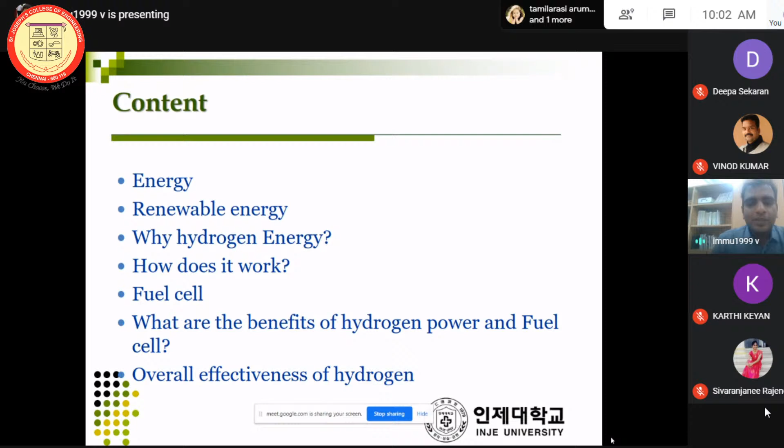Everybody needs energy. If we want to walk, we need energy. If you want to ride a bicycle, we need energy. If you want to ride a car, we need energy, but it's a different form of energy. If you want to watch a TV, we need energy. If you want to work on a computer, we need energy. Energy is not only physical energy, energy is available in various forms, so we are using that energy according to that purpose.

By this time, everybody knows some common facts of energy - what is energy, where it is coming from. Generally people think it's coming from the combustion of fossil fuel like petroleum and natural gas or coal, or from nuclear energy, which is converted later into electrical energy as electricity. Everybody knows about electricity, but electricity is not a primary energy source. It's a carrier - it helps to store the energy and helps to transport the energy according to our use.

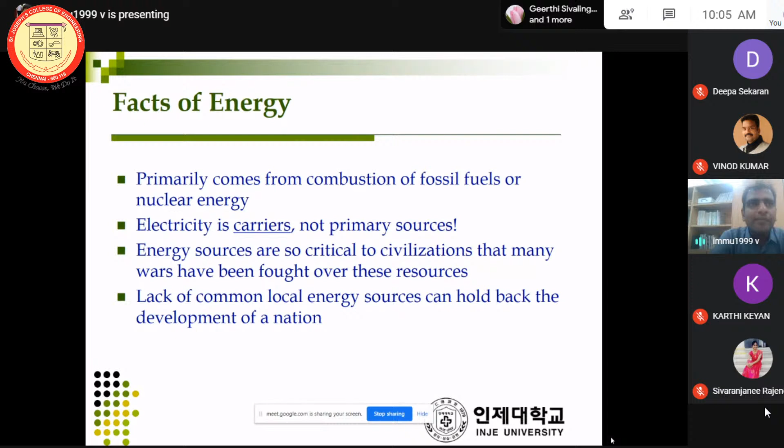In history, energy is very, very important for humankind. There are many wars that have been fought to conquer energy resources. If the country has good energy resources, the country would be a rich nation, like Saudi Arabia, United Arab Emirates, and Qatar - these countries have only energy resources other than nothing, but they are now rich countries. Likewise, if the country has good power but does not have energy resources, its development is held back, which leads to poverty.

So energy is available in various forms. According to the first law of thermodynamics, energy cannot be created or destroyed, but one kind of energy can be transferred into another kind of energy. So here are some examples of forms of energy.

One is heat energy. Everybody knows about heat, it's very common, available everywhere. Heat energy is released as a result of atom movement. The next one is electrical energy - electrical energy is created by the flow of electrons from one place to another place, so the flow of electrons creates electrical energy. Likewise, potential energy - potential energy is the internal energy for any material.

And chemical energy is energy stored in the form of chemicals, and it can be released by chemical reactions. That is called chemical energy. And finally, nuclear energy. When we break the atoms, it releases its energy, and later it converts to thermal energy or electrical energy.

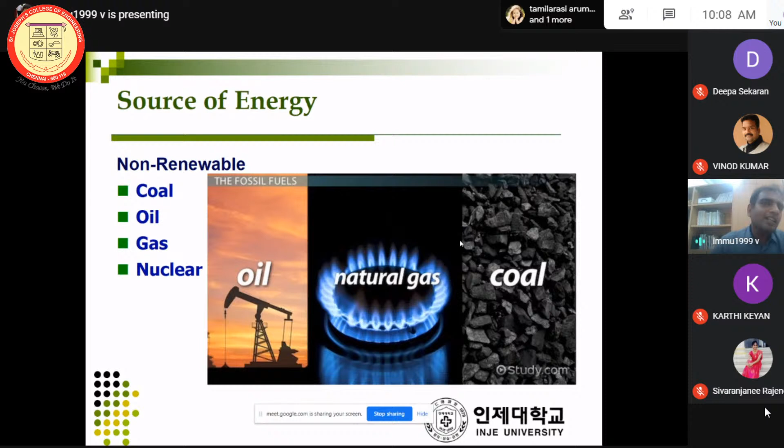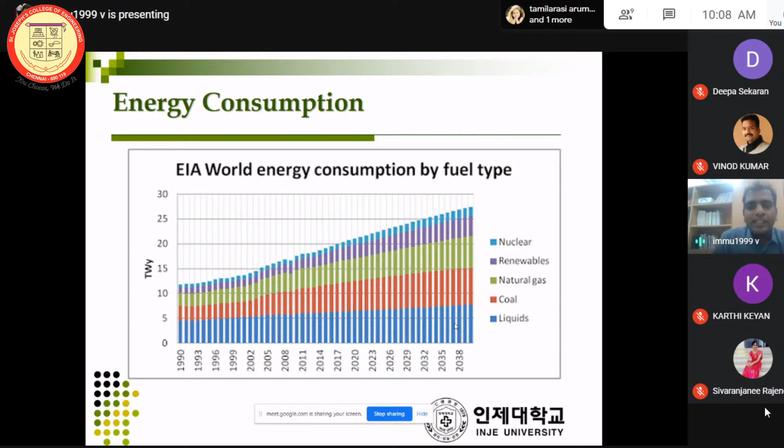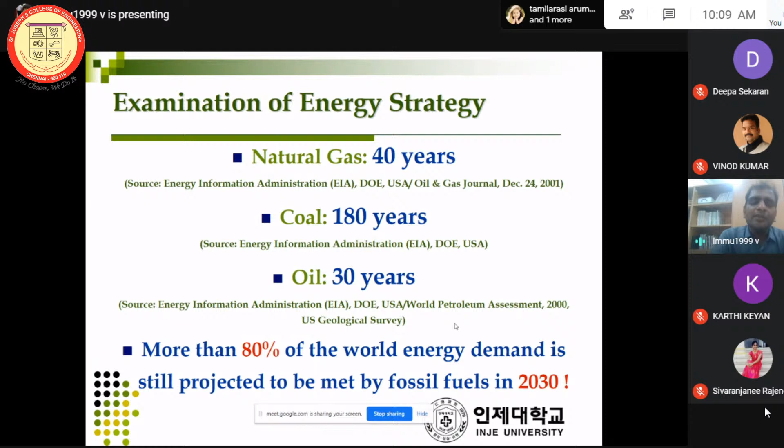Moreover, around 80% of the world's energy demand still depends on fossil fuels like petroleum and natural gas.

The demand is one side, that is one problem. But on another side, when we use fossil fuel and burn it to produce energy, it emits carbon dioxide as a byproduct. That carbon dioxide is not good for our earth, because it increases heat through the greenhouse effect. So it adversely affects the environment.

Also, fossil fuel is not forever - it has a limited amount. So when we use fossil fuel, the depletion keeps reducing the source of fossil fuel. One day, ultimately, it will end and we will not have energy anymore. Also, the transportation cost is very high to transfer fossil fuel from one place to another.

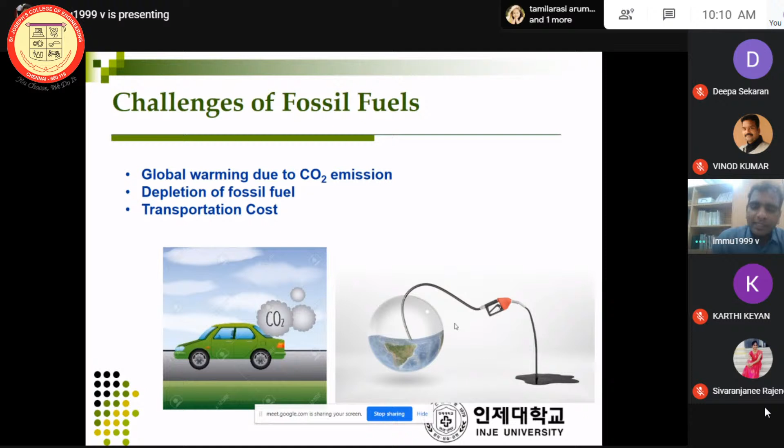But these are just a few of the challenges of fossil fuel. So we must produce, or rely on, some other energy - thanks to science and technology. This is the current situation with our use of fossil fuel, so we cannot go on like this for long. We must develop renewable energy.

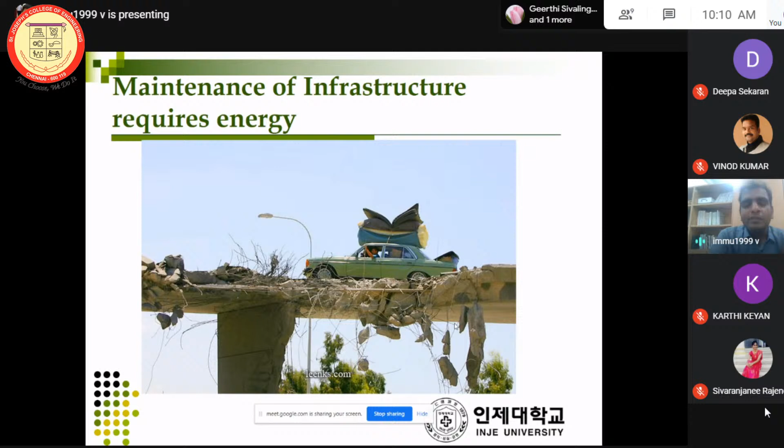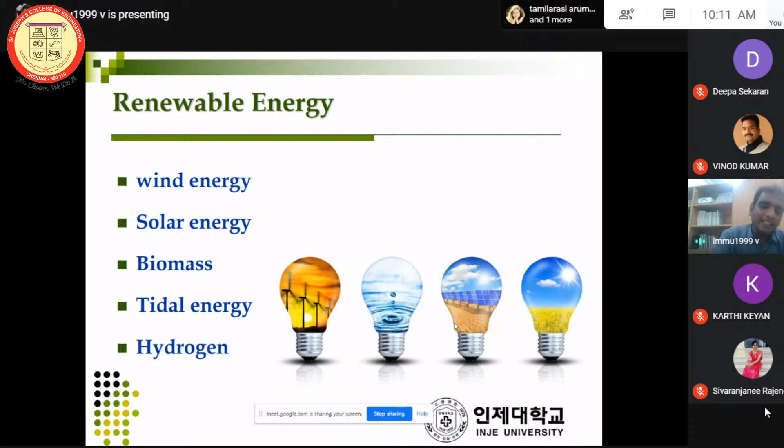So these are the renewable energy sources available through science and technology: wind energy, solar energy, biomass, tidal energy, and hydrogen energy. We are going to see briefly about this renewable energy.

The first one is wind energy. Wind energy is very common - we can see it very commonly in India and other countries. If you go to the southern part of Tamil Nadu, in Nagercoil and that side, we can see many windmills.

A windmill generally produces electricity from wind. When we have wind, the turbine rotates, and based on the rotation's kinetic energy, we get electrical energy. This is a very clean form of energy, and nowadays countries are implementing it more and more. But one of the major problems is that the maintenance cost is very high, and the implementation cost is also very high.

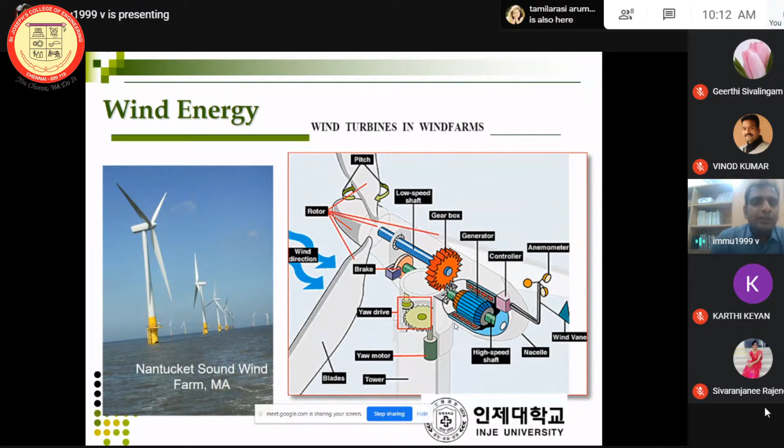Another reason wind energy is not ideal is it's not good for the animals. When birds fly, there are many chances they die when they come near the fans. So wind energy is useful, but we cannot completely rely on it.

The next one is solar energy. Solar energy is common nowadays because everywhere we can see solar panels. Solar energy comes directly from sun radiation, which is converted into energy. This is also one of the clean energy methods; it does not require any carbon dioxide emission.

But when we use this energy, the major challenge is it needs a lot of space to produce a small amount of energy. Another challenge is storing the energy. Once we harvest it, we must store it for later use, but storing in batteries is not good because we cannot store all the energy we harvested completely, and there are also transportation problems. So we cannot completely rely on solar energy; it can work to some extent for some applications, but not for all applications.

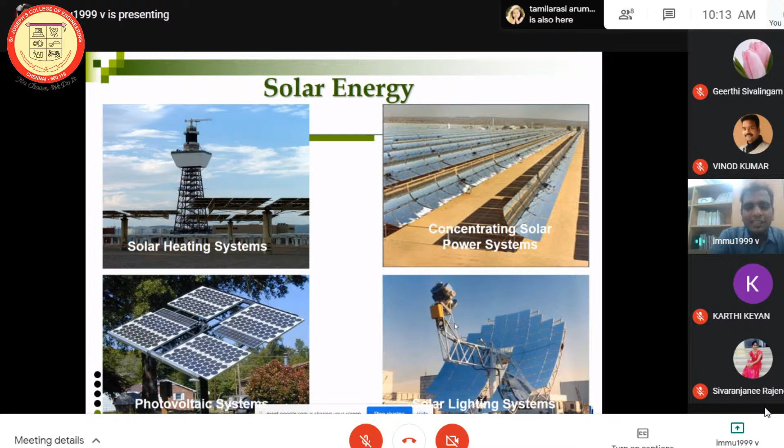With this background, I would like to introduce hydrogen energy. We always hear about hydrogen because it's not a strange chemical.

Hydrogen is one of the abundant chemicals in the world; it's available in huge amounts. But it is always in another form, associated with carbon as a hydrocarbon, or associated with oxygen as water. So the hydrogen we have is not freely available, but exists in different forms. Also, hydrogen is not a fuel; it's like electricity, meaning it's a way of storing and transporting energy from one place to another, similar to a battery.

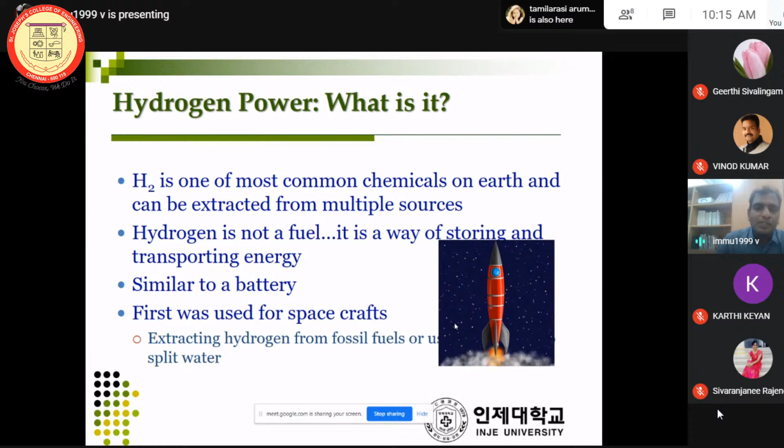Hydrogen is not a new concept, it's an old one. People have been researching hydrogen energy for more than a few hundred years, and it has been used in many spacecraft. This hydrogen has to be produced from its sources, so later we will see how it can be produced.

Now why do we need to use hydrogen compared to other renewable or non-renewable sources? Because the power density, the energy produced from hydrogen, is very high. Compared with fossil fuel, it's almost 3 times more. Hydrogen gives around 120 megajoules per kilogram, while fossil fuel gives only around 40 to 50 megajoules per kilogram.

When we use hydrogen, there is no emission of carbon dioxide, so there is no adverse effect on our environment. We can save our environment from the greenhouse effect and global warming. Also, when we produce a lot of hydrogen, we no longer need to depend on oil-importing countries from the Middle East; we can produce our own hydrogen for domestic and industrial purposes. Also, using hydrogen lets us save our fossil fuel reserves for emergency purposes.

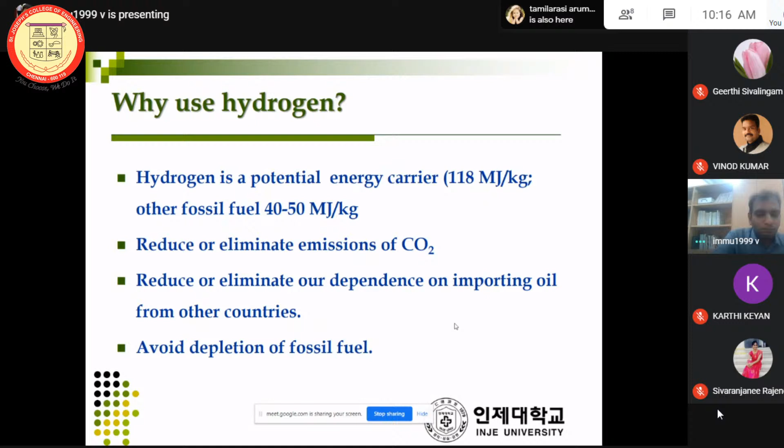So we have a lot of hydrogen, but we must produce it from its sources. There are two kinds of sources: one is hydrocarbon, like petroleum products such as oil, coal, and natural gas. The methods to produce hydrogen from these are partial oxidation, gasification processes, and steam reforming processes. But when we take hydrogen from hydrocarbons, we have a problem: we may use hydrogen, but producing it causes carbon dioxide emission and depletion of fossil fuel. So taking hydrogen from fossil fuel is not a reliable method.

We have to look at other methods. There are some other methods available from biomass and some chemical methods, but these are still under pilot stage and the efficiency is not very high.

Another important method is producing hydrogen through electrolysis. The source of hydrogen is hydrocarbon, and another is water—we have a huge amount of water. Water can be split into hydrogen and oxygen using electricity. So we need to give electricity, but there's something strange here: we have to give electricity to produce hydrogen, which we then use to produce electricity again, so at the end of the day we get nothing unless we get this electricity for free.

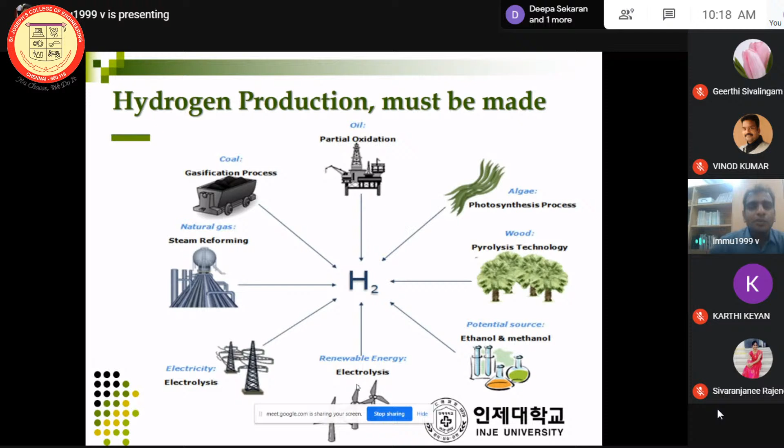One technology is electrolysis, using electrical energy coming from renewable energy, which is essentially free. So we can use renewable energy electricity to produce hydrogen, and later use it for specific purposes. Hydrogen from water is one of the long-term solutions for hydrogen production using renewable energy sources. This method is called proton exchange membrane electrolysis.

At the anode, water is oxidized and 2 H+ ions are produced along with 2 electrons. These H+ ions cross through the membrane and electrons cross through the external circuit. I will explain this in the picture later. Likewise at the cathode, the proton is reduced, gaining 2 electrons, and released as hydrogen.

It's a polymer. Many people know about the membrane. It's a polymer, so it has a specific property - it will allow only some specific charges, maybe positive or maybe negative. So this is called an ion exchange membrane. The anode and cathode are separated by this ion exchange membrane.

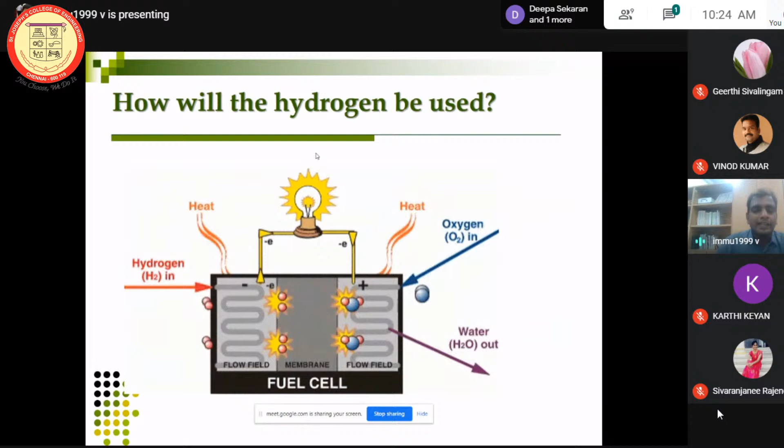So why would we use this fuel cell in fuel cell vehicles, which have to be specifically designed for future purposes? Why do we need to go for the fuel cell? Because it can replace the internal combustion engine, which runs on diesel, petrol, or other fossil fuel.

Because the fuel cell's efficiency is higher compared to internal combustion engines. The fuel cell efficiency is around 50 to 60%, whereas the internal combustion engine efficiency is around 15 to 20%.

And when we use the fuel cell, we have some electrodes and membranes. There are no moving parts, so there is no noise.

There is no noise, meaning less pollution, and little maintenance because there is no moving component. So we do not need much maintenance for the fuel cell vehicle. And because there is no carbon dioxide emission, there is no environmental pollution.

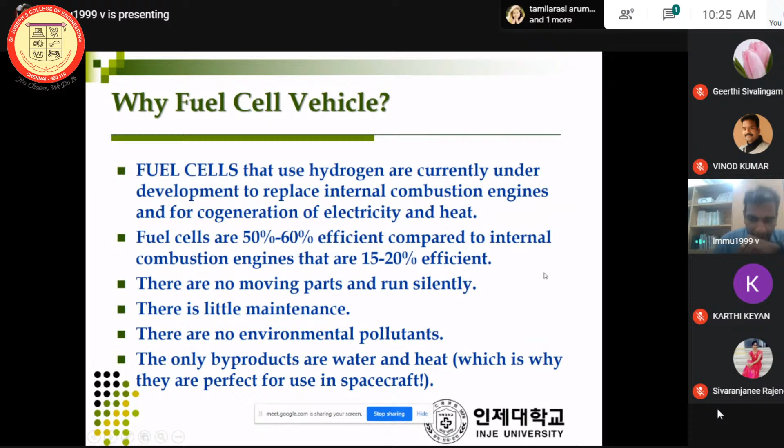The byproducts are water and heat, and this heat can also be used for some useful purposes later. This is one of the proposed models to use the fuel cell with water as the fuel, because we get hydrogen from the water.

From the water, we have a water splitting unit, like electrolysis, and we split the water into hydrogen and oxygen. That hydrogen is clean, and this is the input for the fuel cell. As I explained, the raw material input for the fuel cell is hydrogen and oxygen.

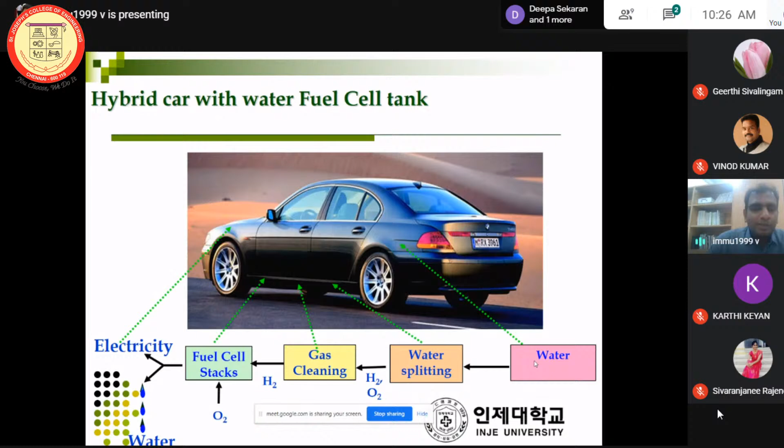Now let's see a small video clip of how the fuel cell vehicle is working.

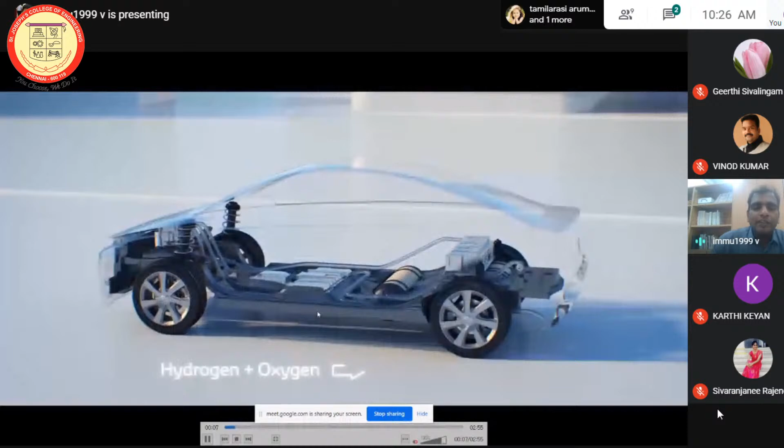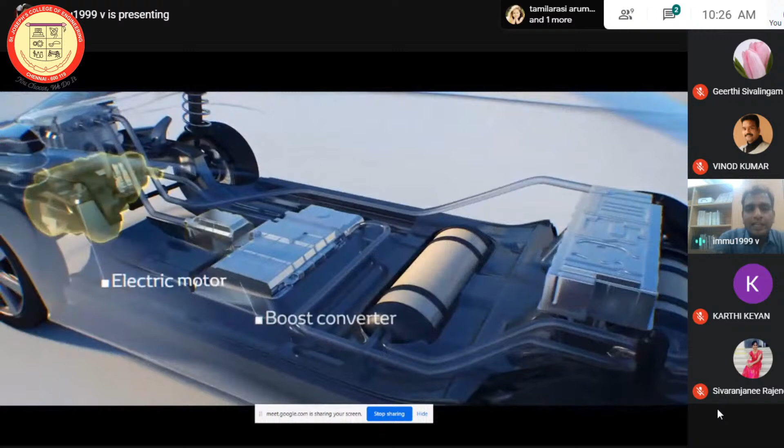This is the fuel cell vehicle technology. This is the model of the fuel cell. Hydrogen and oxygen react to produce electricity and water. It has provisions for hydrogen tanks, a fuel cell, a battery, an electrical motor, and a conversion unit. When it runs, hydrogen comes from the hydrogen tank and oxygen comes from the air, and electricity is produced in the fuel cell unit, which powers the car.

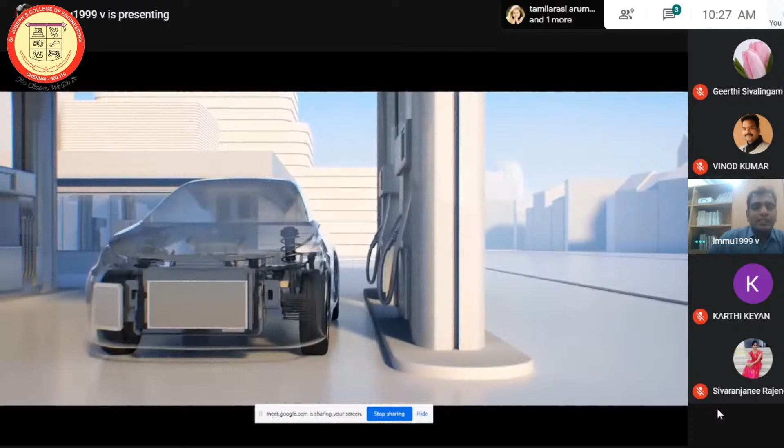So how do you fill hydrogen in the hydrogen tank? It's very easy, because within 3 minutes around 70 megapascal hydrogen can be pressure-filled into the hydrogen tank.

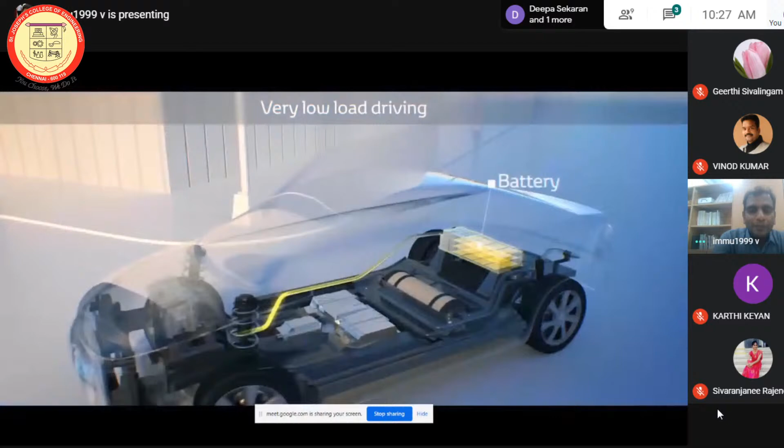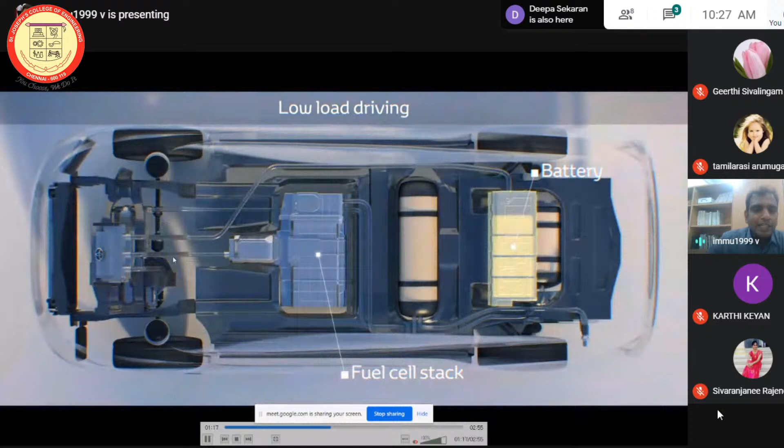When the car is moving slow, low loading, the energy can be taken from the battery. But when the car moves faster, we constantly get electricity from the fuel cell. Hydrogen comes and oxygen comes from the air, and electricity is produced. Based on that electricity, this fuel cell vehicle runs.

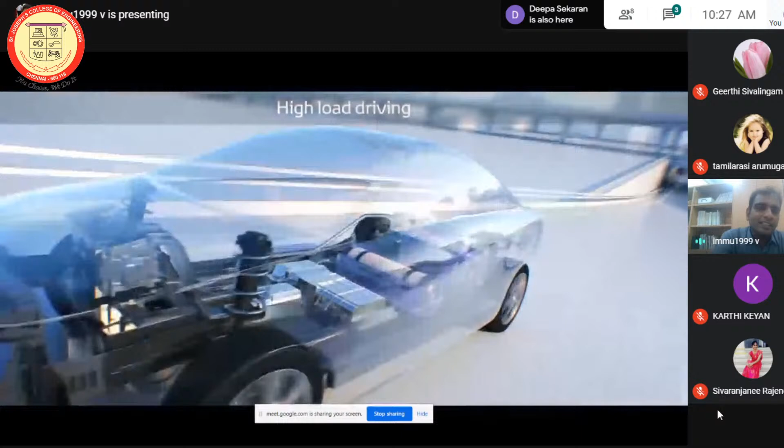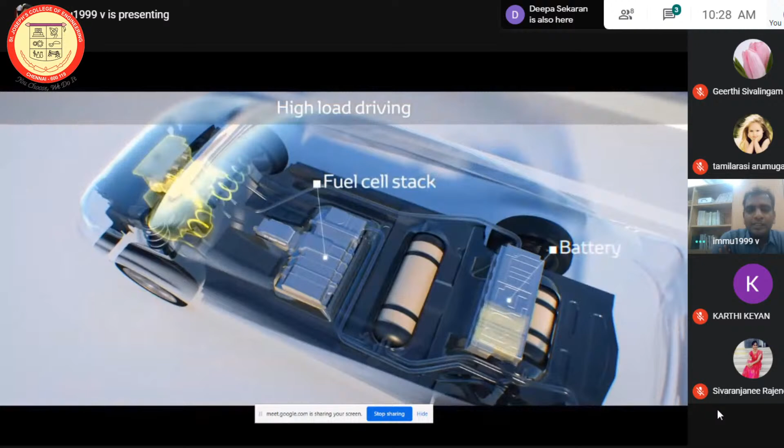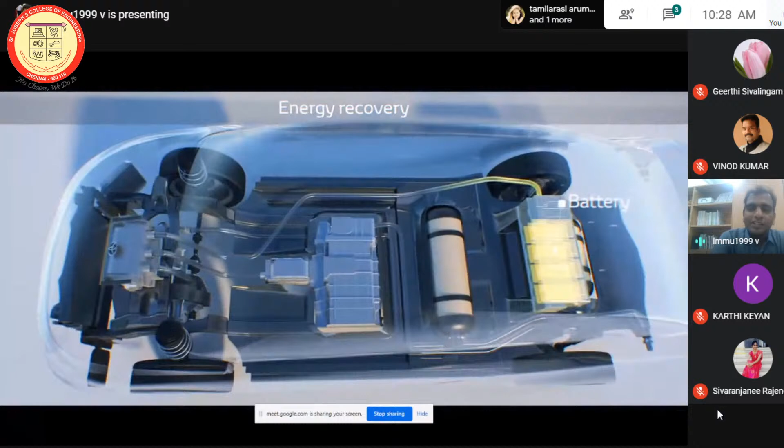When we need excess electricity, we can take it from the fuel cell unit and the battery. Also, when the car is slowing down, we can get energy back, and that energy is saved in the battery for later use. So this is how the fuel cell car works.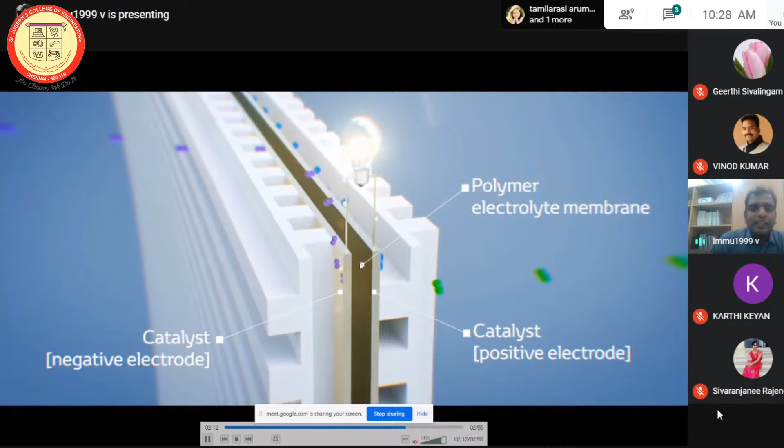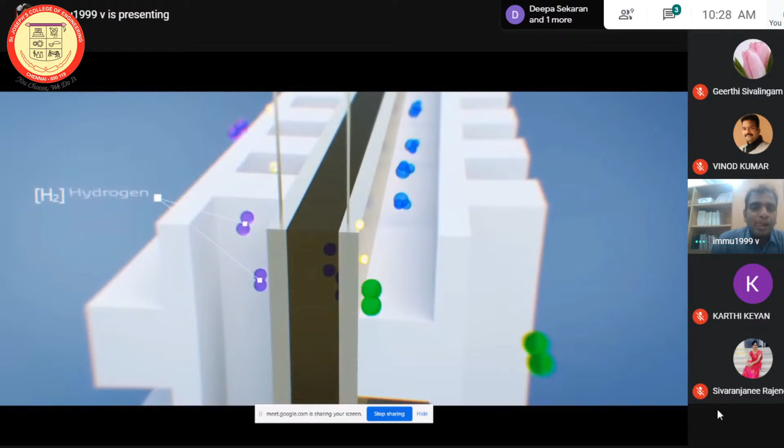Due to the oxidation, electrons flow here. Here we can see the electron flow. The flow of electrons is electricity, and from that electron flow, the car runs. The byproduct is water, where oxygen and hydrogen join. So the byproduct is water and the main product is electricity.

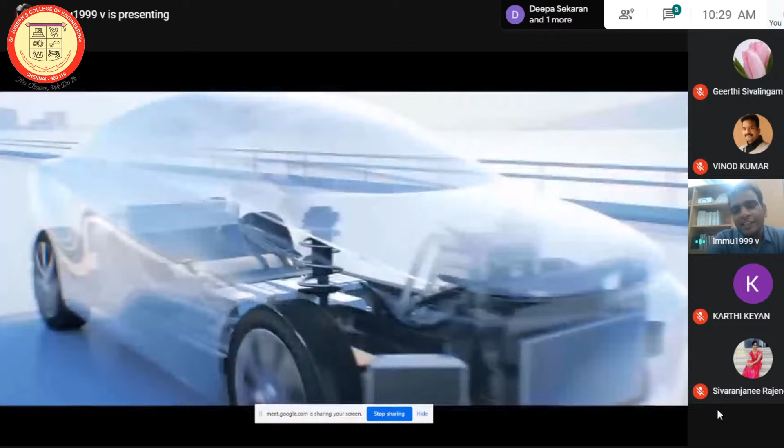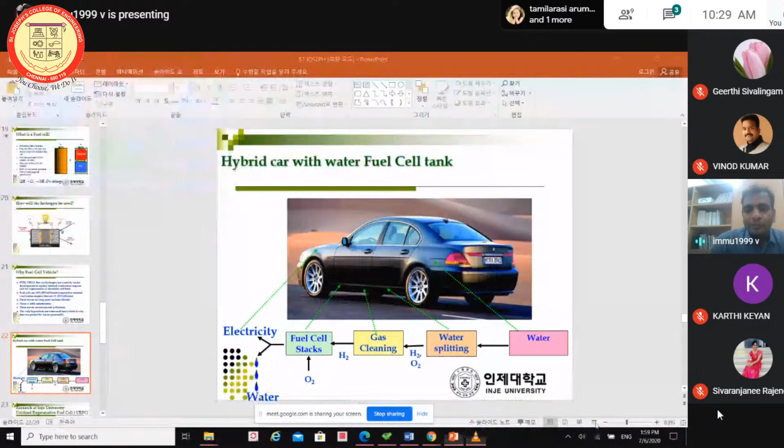This is the way the fuel cell vehicle works. With renewable energy, hydrogen, and the fuel cell, it is possible to make the fuel cell vehicle. Now we'll go back to our presentation.

Hydrogen fuel cell and renewable technologies are already proven, and people are sincerely working to commercialize this fuel cell vehicle. I hope within 10 or 20 years it will be very common on our roads.

But at present, we are continuously researching a new technology called URFC, unitized regenerative fuel cell. As I explained, the electrolyzer and fuel cell are separate units, but now we are merging them into a single unit.

Based on this single unit, we produce hydrogen when it is in electrolysis mode, and we produce electricity when it is in fuel cell mode. We get this electricity, and we have water, just water and electricity from renewable energy sources. From that, we produce hydrogen, and later that hydrogen is used as fuel for the fuel cell, which can then be used for the end purposes.

This same single unit is called a unitized regenerative fuel cell.

If this URFC technology is developed and commercially available, we can use it for unmanned aerial vehicles. By fixing this URFC cell in drones, for up to 6 months to 1 year we would not need to spend any extra energy. It can automatically be used once this technology is developed, approved and commercially available. So we are constantly working to develop this technology.

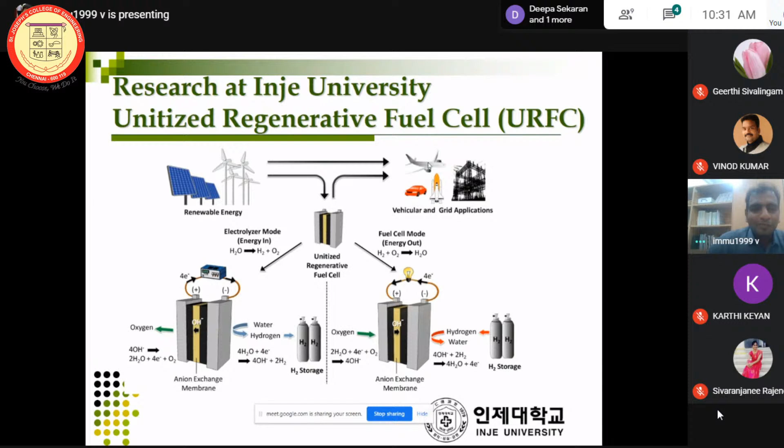Apart from URFC, another technology is called solid oxide fuel cell, which uses solid oxide as the electrolyte. This is a high temperature fuel cell, working above 900 degrees Celsius. Developing materials to work at this high temperature is highly challenging, so that is the next work we are trying to do.

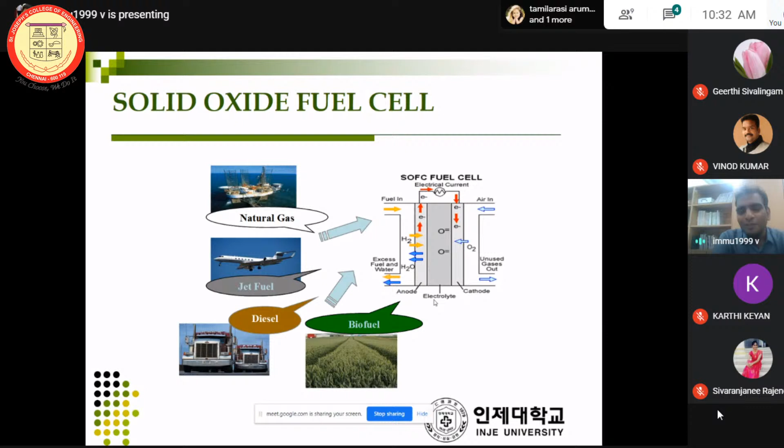If this is developed, we can also use all our old fossil fuels like natural gas, jet fuels, diesel and biofuels. This renewable energy, fuel cell and hydrogen research is an interdisciplinary area because nowadays we all depend on each other's department: chemical engineering, mechanical engineering, physics, chemistry, civil engineering. We all need to develop this technology together.

For example, physics department works on photovoltaics, getting electricity from the sun. Chemistry works on materials, what kind of membrane and polymer they can choose, and how to modify the polymer and electrode. Civil engineering works on wind energy and transportation of energy from one area to another. Chemical engineering mainly works on the fuel cell, because it is related to chemical reaction engineering, since the fuel cell works based on chemical reaction engineering.

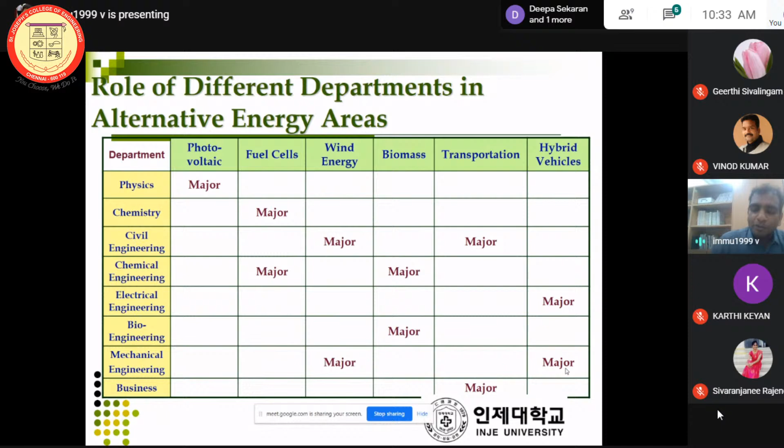Many chemical engineers work on fuel cells and on getting energy from biomass. Electrical engineering is very important for making fuel cell cars and hybrid vehicles. Mechanical engineering is also needed for wind energy and fuel cell cars. So it's like a cooperation we need to make this fuel cell, hydrogen and energy technology successful.

So with this, I now conclude this presentation. Hydrogen and fuel cell technologies are a promising alternative to our current automobile fuels, but there are still many challenges that need to be addressed. One major challenge is storage, because we can produce hydrogen, but it has to be stored in a big hydrogen storage tank, and transportation from one place to another is a bit challenging. That is why we are now concentrating on hydrogen storage like URFC.

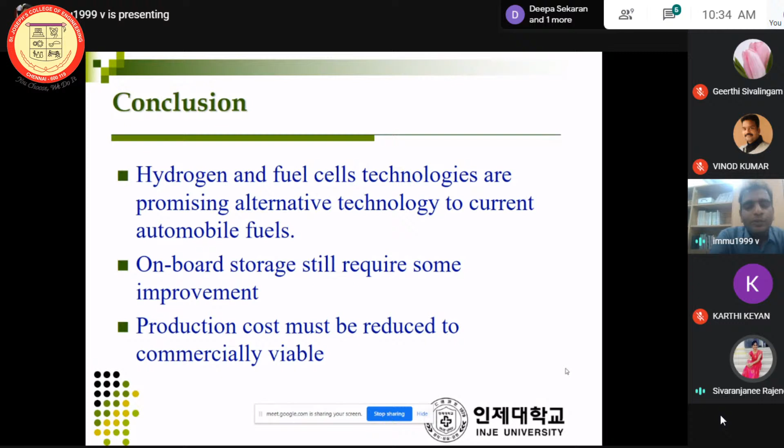Another challenge is the cost to produce hydrogen. To produce 1 mole of hydrogen is still very costly relative to the energy we get. We give more energy to produce it than the energy we get back. So these are still challenges that need to be addressed in the future. I hope it will be addressed soon. We, and researchers all over the world, are constantly working to make this technology commercially available. Thank you for listening to this presentation. Thank you so much.